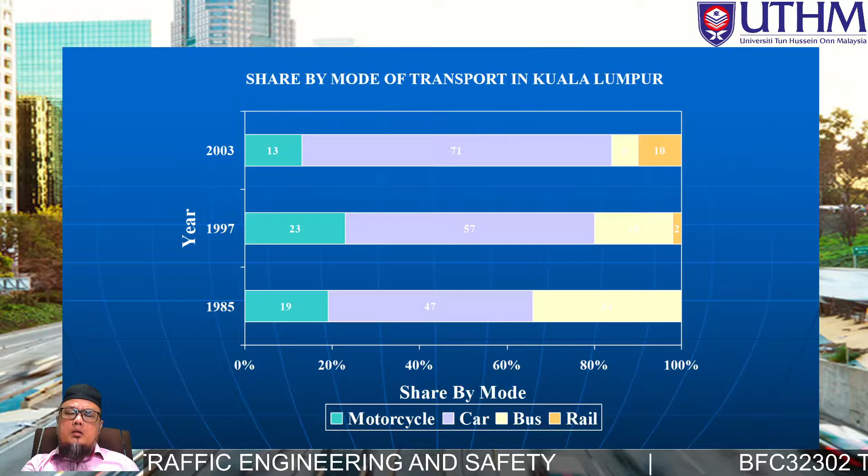And very few people use the bus nowadays. The bus still operates for service, but with very limited numbers. Now rail-based transport has become the popular transport - LRT, monorail, ERL, and now MRT.

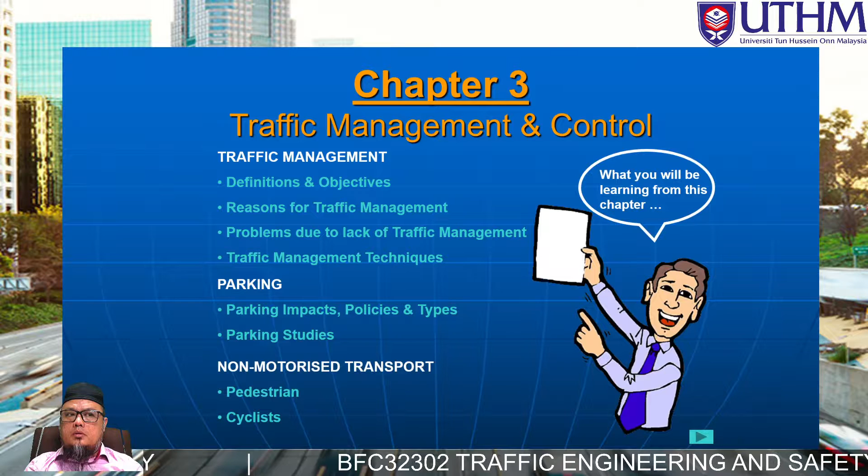We provide more lanes, but we create more congestion because people go to use their own vehicles. But if we concentrate on public transport or other modes of non-motorized transport, it can create sustainability in terms of the transportation system.

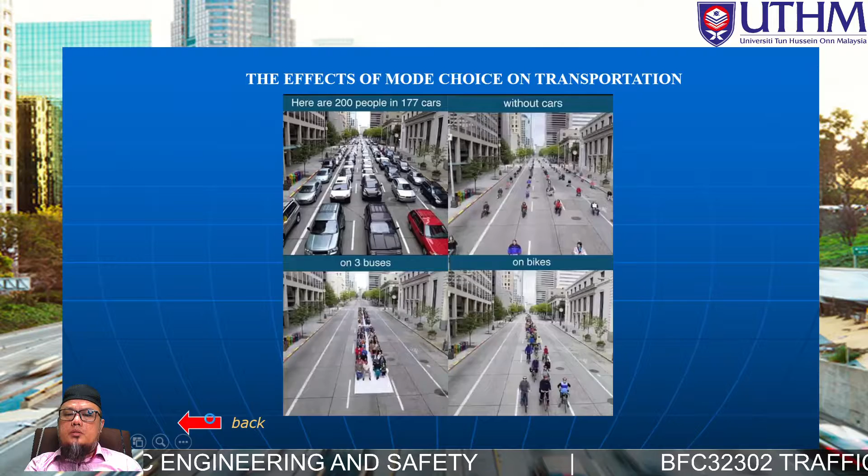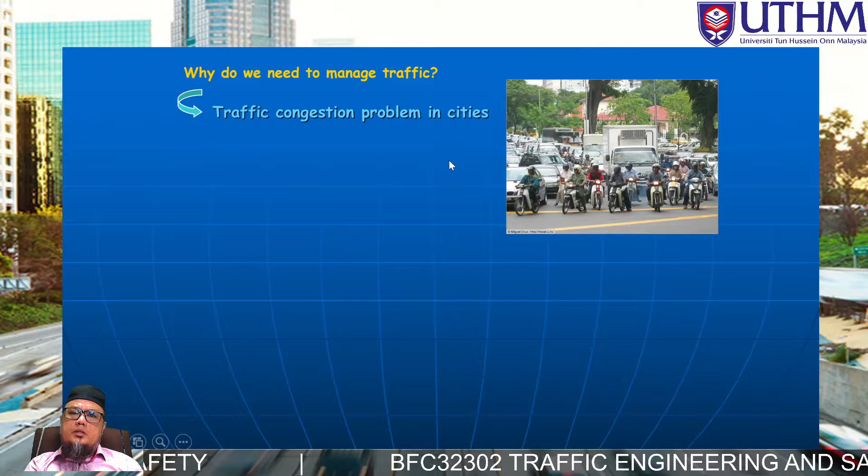Why do we need to manage traffic? We go back to the problem of congestion - that's why we need to manage our traffic. High urban population growth results in increased vehicle ownership, as we've discussed. The number of private vehicles traveling in the city is high, resulting in traffic jams. You can see this scenario every day in the KL city center.

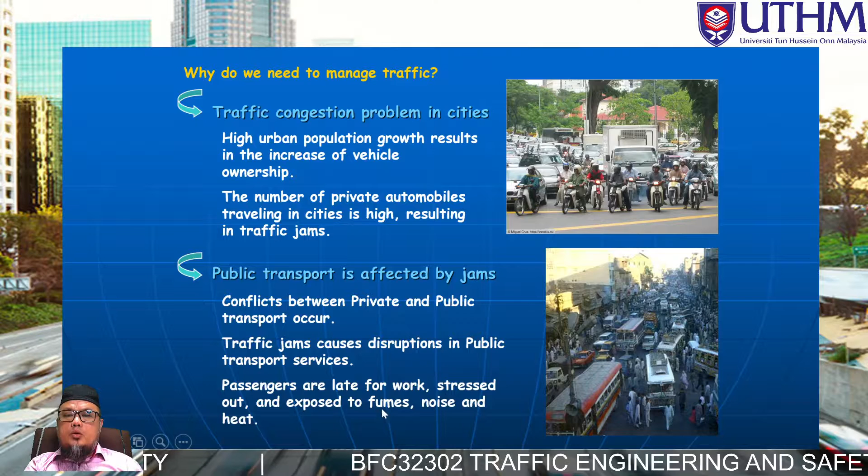Public transport is affected by jams. Even if we try to provide more public transport, they also suffer because they share the same infrastructure or route network, unless a dedicated lane is provided for buses. There's conflict between private and public transport - traffic jams cause disruption of public transport services. Passengers are late for work, stressed out, exposed to fumes, noise, and heat.

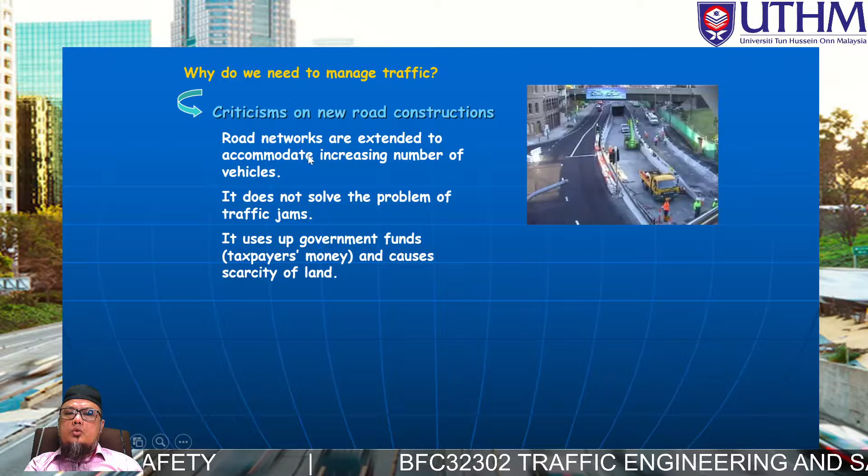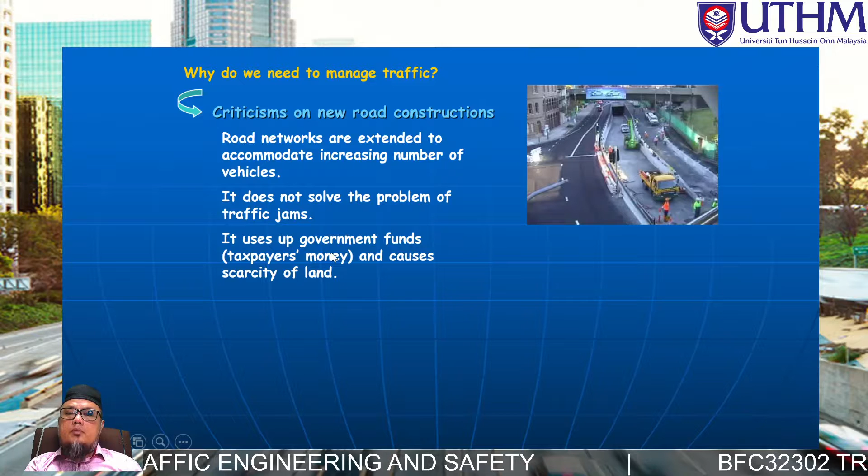Other negative impacts are environmental and health issues due to emission of carbon from combustion engines, which creates pollution. High energy from fuel consumption, exhaust fumes, heat, and noise cause pollution and health problems.

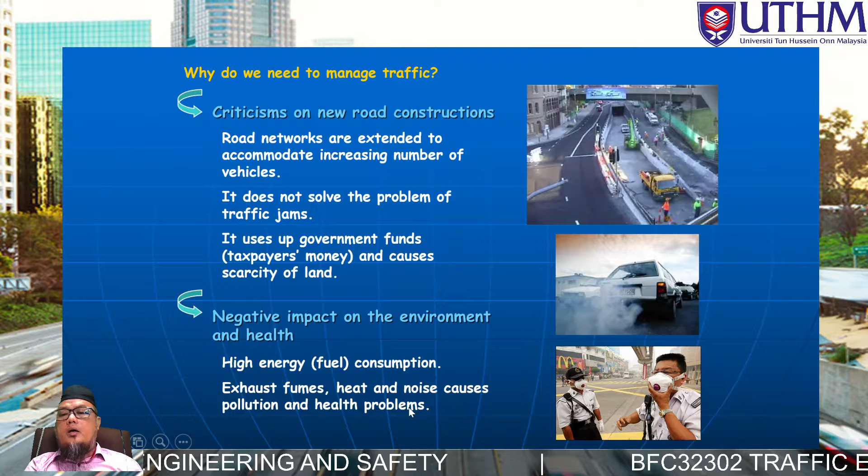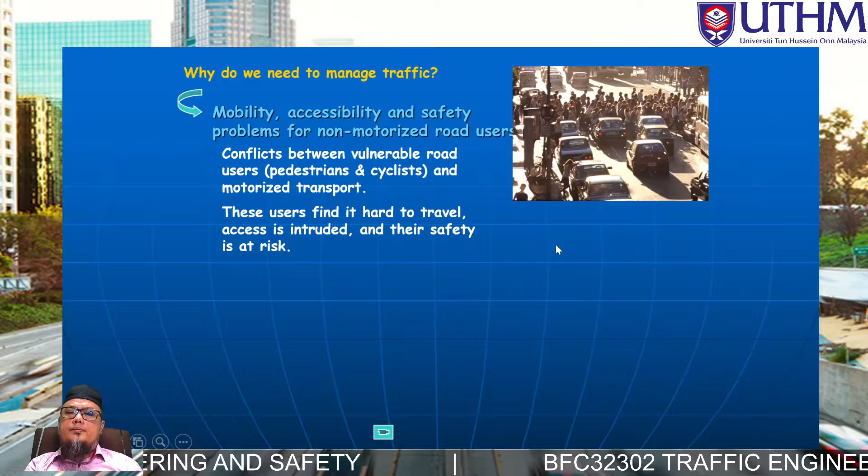Next, increased travel cost. Cost in terms of money and time increases as more time is spent on the road due to traffic jams, because we're stuck in the road using fuel that takes a lot of time. Then we produce more fuel consumption. This is quite a sarcastic message directed at the combustion or fossil-based fuels.

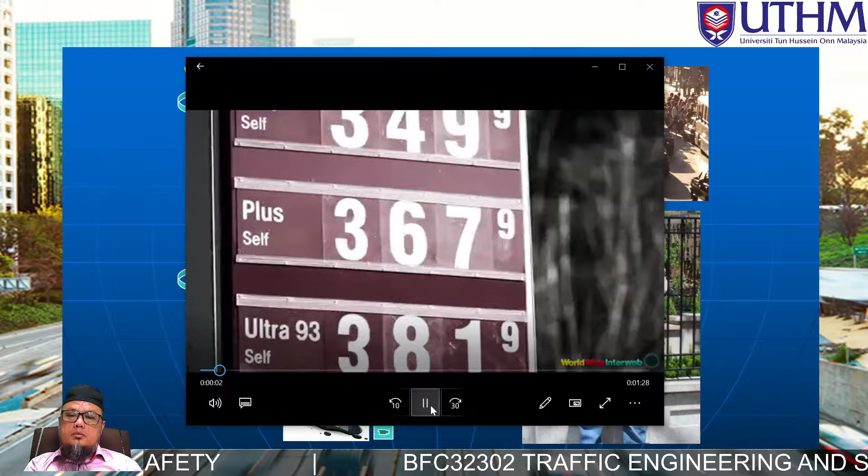As oil gets scarcer, gasoline gets more expensive, and the planet suffers. Electric cars? Most of their electricity comes from coal-fired plants or nuclear reactors. So what's the answer? How about a car that's good-looking, affordable, and runs on clean...

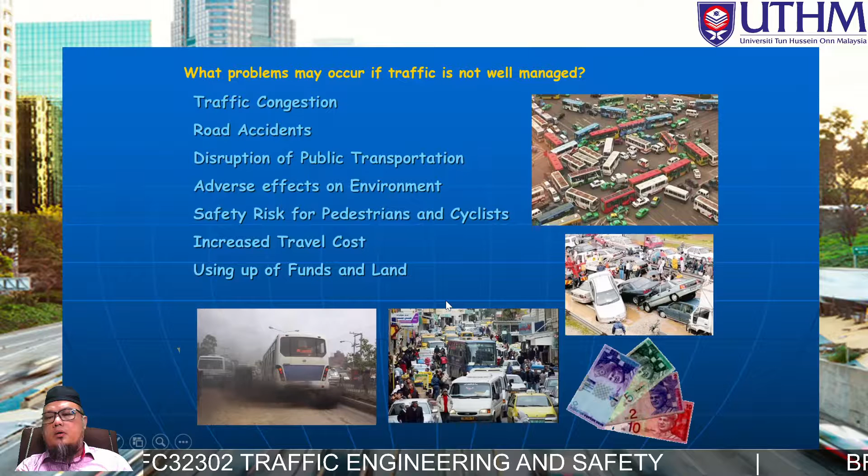What problems may occur if traffic is not well managed? We see this kind of scenario: traffic congestion, road accidents, disruption of public transport, adverse effects on the environment, safety risk for pedestrians and cyclists, increased travel costs, and using up fund and land, with a lot of area being used for infrastructure.

Traffic management technique. If you look at this matrix or table, it simplifies what category we're going to focus on. We focus on improve capacity, or we're going to allocate priority of road users, or we're going to constrain some categories of vehicles.

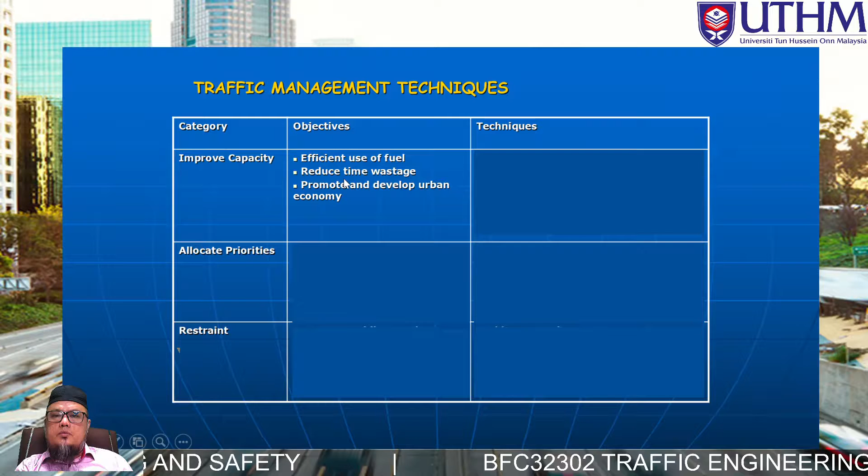Let's move to the objective. If the objective is to achieve efficient use of fuels, reduce wastage, reduce time wastage which is delays, and promote and develop urban economy, we can use this kind of technique or approach.

If you focus on allocating priorities, objective one is to protect non-motorized road users, vulnerable users from pedestrians and bicyclists, and increase effectiveness of higher occupancy vehicles. This one is focused for HOV. Later we're going to cover what HOV is, high occupancy vehicle, which means more passengers on the vehicle.

Next, for the technique for this purpose, we're going to focus on pedestrian areas or pedestrian precincts, cycle lanes, bus and HOV lanes, selective detection at signals, and exemption from other regulations.

So if we're going to do restraints on certain vehicles, why do we want to improve public amenity, protect environments, or improve safety? We can impose techniques such as parking controls, physical restraints, area licensing, road pricing, and traffic calming schemes.

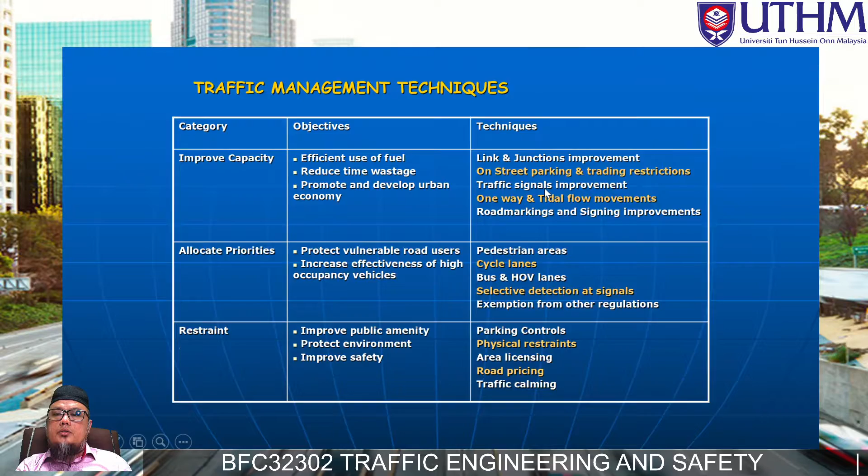If you go to the details, the first one is link and junction improvement or on-street restrictions. This one is link and junction improvement. Purposely, if you do this kind of method or approach, we're going to increase capacity and enhance safety, reduce delay, and control speed. So this is the generalization.

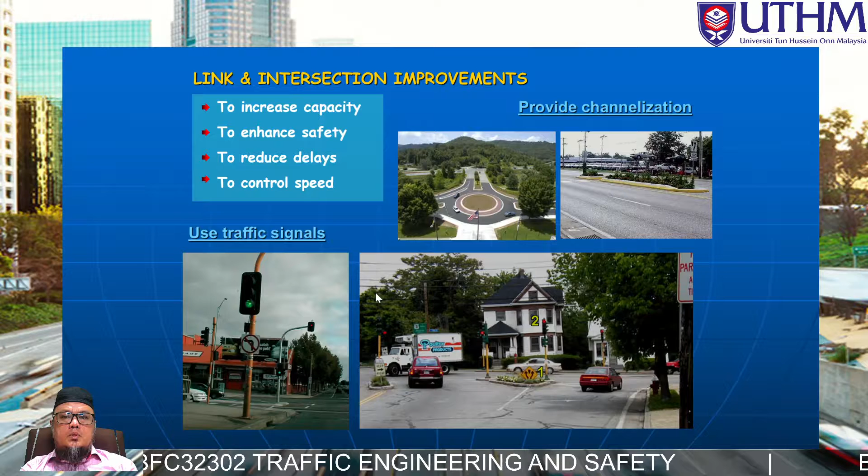Next, create safe crossing for pedestrians, provide large waiting area, pedestrian refuge, and shorter cross distance. This is the typical pedestrian crossing area, and this one also the crossing area for mid-block. They have a staggered crossing because the lane number is quite many, so they have 4 lanes to cross. They put a pedestrian refuge area here, so you cross the first lane or first direction lane, wait here to get clearance or a safe gap from the vehicles, and cross again.

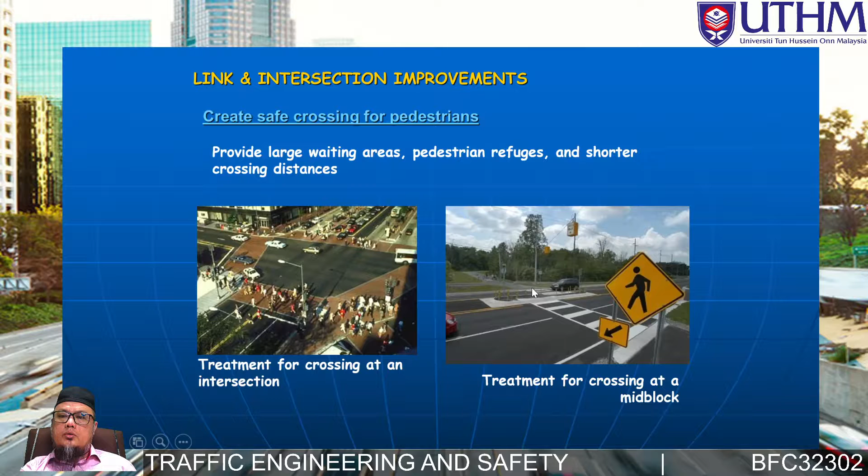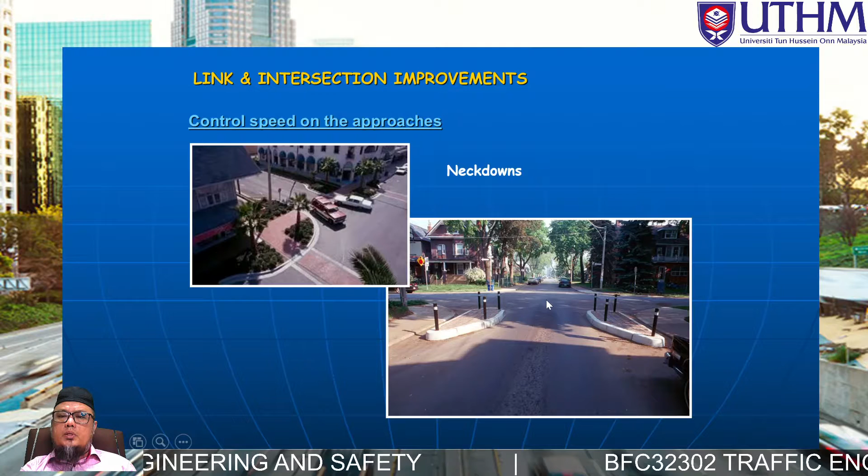Now we have control speed on approach, so we have neck-downs for particular approach intersections. They built traffic islands or hard landscaping or curbs here, typical physical islands to choke or neck down this particular approach, so the vehicle is going to slow down.

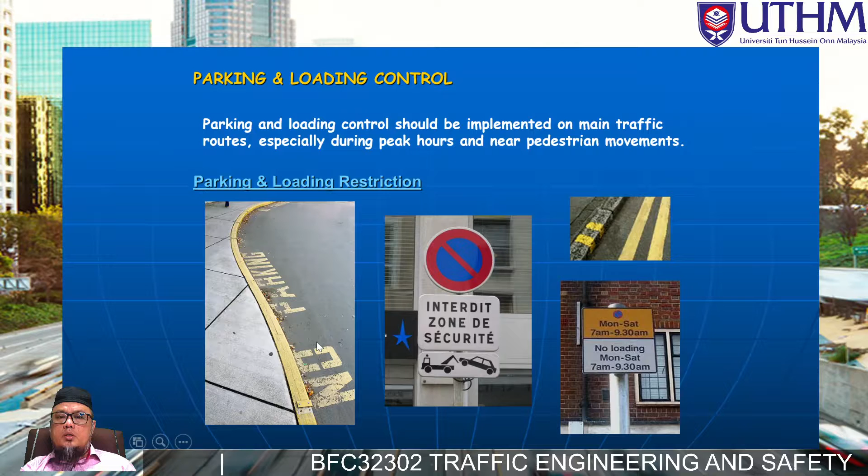Here is parking and loading control implemented on the main roads, especially during peak hours. They put the sign here, no parking restrictions. The benefit of parking and loading restrictions is to relieve traffic congestion, so we avoid people waiting because of vehicles trying to unload passengers or goods.

It also improves safety and improves visibility for pedestrians to cross. Like this particular scenario, if there's a parking medium-sized vehicle, a lorry or utility vehicle, it's hard for pedestrians to cross because it blocks the sight distance.

One, on-street parking restriction enforced, provide sufficient off-street parking. If we're going to restrict this particular parking facility, we have to provide other options for off-street parking space. We're going to cover that in the second part of the lesson.

Okay, designate loading areas, allocate for loading activities. Loading can be permitted only for the back lanes. For example, a particular supermarket has its own access to the back or rear area to load goods or services.

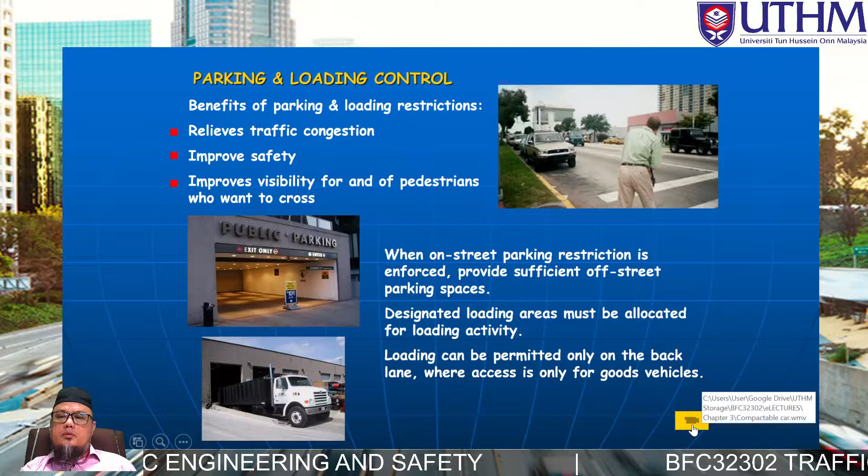Unless we're going to use futuristic, maybe nanotechnology like this one, it's quite impressive. If we have this kind of technology, there's nothing to worry about spacing for parking anymore.

Okay, turning and entry restrictions. We provide rules where some vehicles are not permitted to turn right or left, or some vehicles are still not permitted to do U-turns. So we put some kind of sign to inform that a particular zone or movement direction is not permitted.

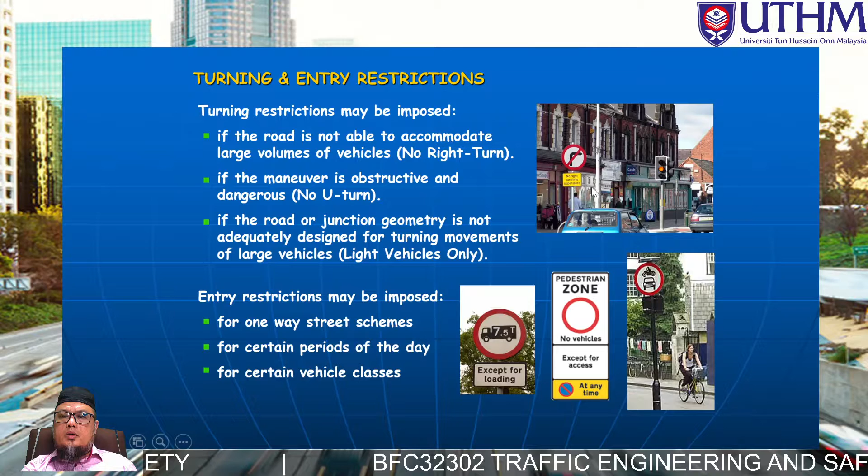Okay, contra flow, or tidal flow, or reverse flow. What's the scenario? We normally have quite massive traffic during peak hour or rush hour, in the morning let's say, or in the evening. So some direction of travel lanes have very heavy traffic, while the other lanes have less traffic, so they occupy one of the extra lanes from the opposite travel direction.

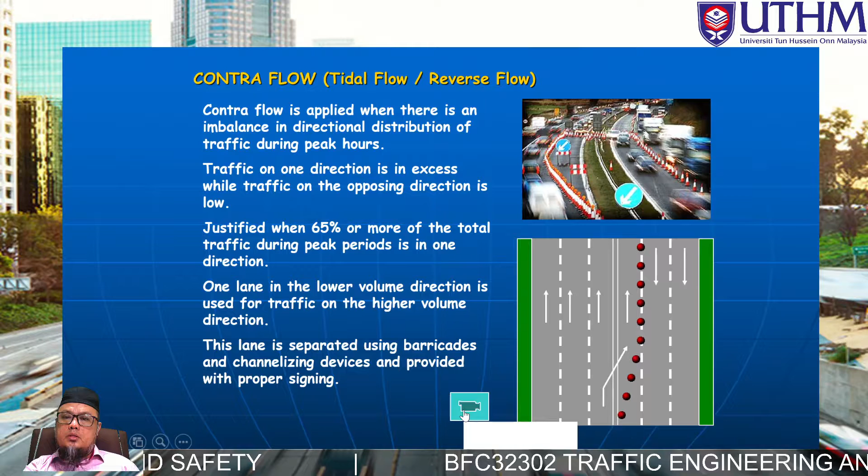It creeps along like a rolling centipede. If you blink while driving down the 15, you'll miss it. But if you slow down and focus, you'll see what Caltrans calls a barrier transfer machine. Normal people call it a zipper. It moves the concrete barrier dividing the express lanes one lane over. It moves slow. Really slow, like 8 miles an hour slow.

But this monster of a vehicle could make the commute up and down the 15 much, much faster for the 169,000 people who use it every day. It gives motorists more flexibility.

All month long, 2 zippers will be moving the center divide over 2 lanes. On a normal day, 2 lanes go each way, but this month, 3 lanes will go at the rush hour commute. Del Cerro resident Alexandra Brown already saves about 20 minutes using the express lanes. If there was 3 lanes, that might help the speed of the commute.

But don't get used to it. Caltrans is only studying how well the zippers handle the 2-hour trek up and down the 15 twice a day in between rush hours. We will be reconfiguring the lanes on a daily basis. Then it will stop at the end of April. It will be up to Sandag, which actually manages the express lanes, to decide whether they want 3 lanes or only 2 for the rush hour commute.

In the meantime, Caltrans wants you to keep an eye out for the barrier transfer machines. You can see in this video from a GoPro outside my 10 News Prius, the zipper is like a giant slow-moving vehicle in traffic. Whether they'll keep moving the barriers back and forth has yet to be decided. Along the 15, Joe Little, 10 News.

Let's take a closer look at the 15 freeway. This is where the lanes will be moved for the traffic. There will be concrete barriers from the 78 on the north side to the 163. There will be more lanes on the southbound side coming down in the morning commute, and on the northbound side, more lanes for the evening.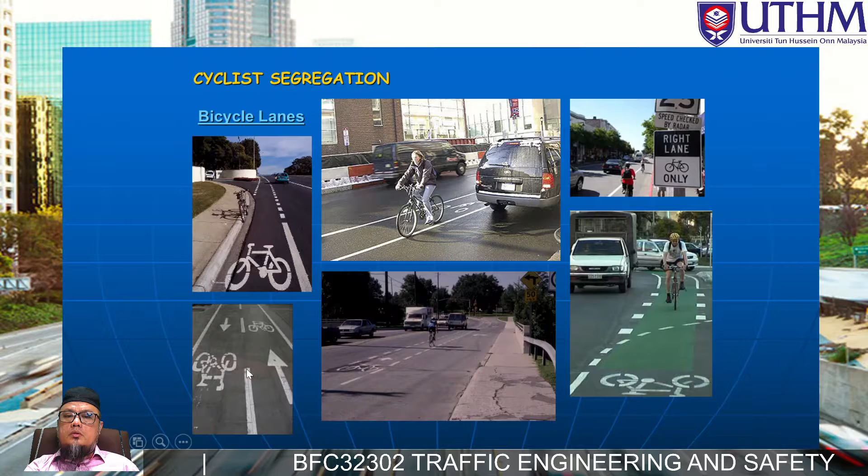Okay, next, bus priority. Smart intersection. Use bus detector to manipulate traffic signal which allow green phase for bus. So we have communication from the traffic signal to allow such vehicle like bus, emergency vehicle, rescue vehicle to give a priority during approaching the signal lines.

So they're going to have a loop detector underneath the pavement, or they can put it into the cable or street lighting pole or traffic signal pole to communicate the radar or the signal.

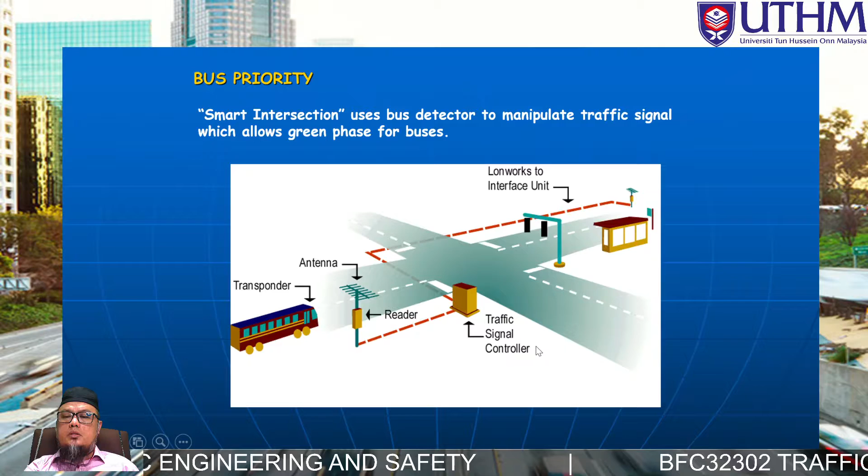Okay, traffic restraints. The types of traffic restraint measures. First, do nothing - this is part of the solution. The approach gives opportunity to the drivers to select the option, to resolve things themselves. Drivers eventually adapt, traveling during off-peak hours resolves some issues. They choose alternative routes or take alternative modes of transport. Because they do nothing, they want to study the road user behavior. But this is just temporary.

Second, physical measures. Ban or prohibit entry for certain classes of vehicles, like imposing restrictions for turning, bus lanes, bicycle lanes, and things like that.

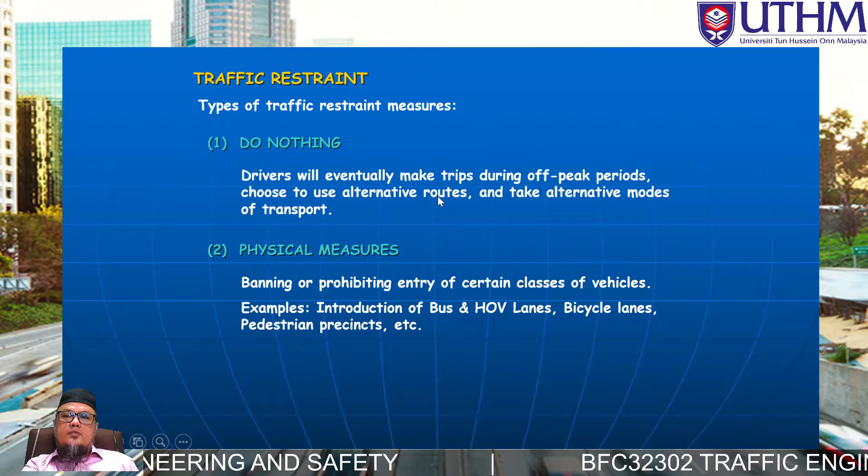Okay, regulatory measures. We impose parking, waiting, and loading area restrictions, or impose stiffer penalties if regulations are violated. We limit the number of parking spaces in the city, and impose higher tax for parking operators. This is in terms of regulatory measures.

Okay, the fourth one, fiscal measures - we use a financial approach. We put tax on the vehicles. Now they practice tax for vehicles, the fuel tax. This is also called road pricing and area licensing, where on any road network, they put a charge, like in Singapore with electronic road pricing. We need to bring an auto pass, like a smart tag or touch and go.

It's also practiced like toll roads. Road pricing is typically like a toll road. But area licensing is more like a cordon - for the cordon, you go there and they charge you. Sometimes they charge based on the length you travel, or based on the time you enter, how long you stay in that particular area.

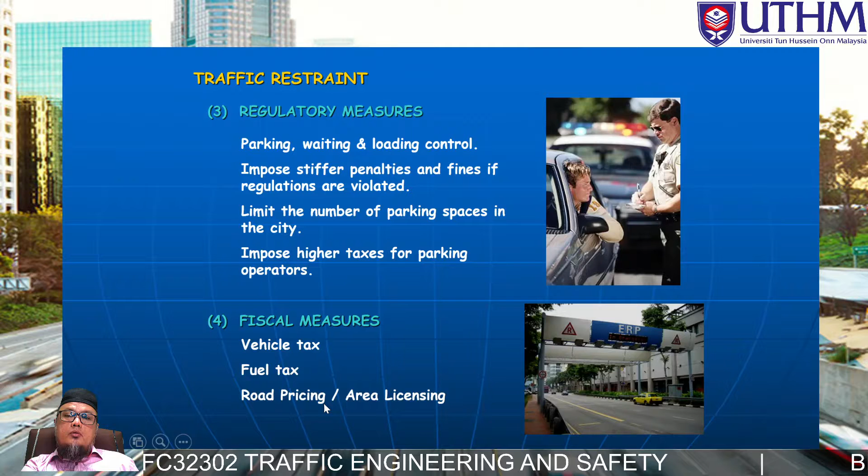Okay, next, traffic calming. Traffic calming involves changes in street alignment, installing barriers, and physical measures to reduce speed or cut-through volumes, in the interest of street safety, livability, and public purpose. So we have a lot of traffic calming schemes - more than 16 types. But we can categorize them as vertical deflection and horizontal deflection. So they can only be categorized as two, but they have a lot of types.

So the first category, vertical deflections, we have speed hump and speed bump. Sometimes people get confused about whether it's a speed hump or speed bump. Speed humps are wider compared to speed bumps. Speed bumps are narrower, but the vertical effect is not pleasant, while humps are smoother and feel more pleasant. This one has a bit of a bump, this one is a bit flatter. Okay, speed lumps are like a panel with rough texture, like panel-panels.

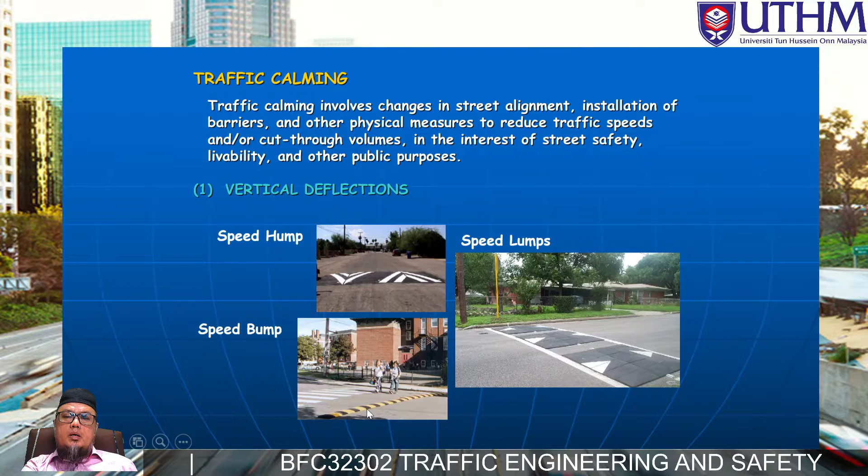Okay, next we have speed table, also covered under vertical deflection. Speed table is more like a raised crosswalk, but wider compared to the raised crosswalk. Speed cushions are quite similar to the lump, but these are installed just at a single lane's width. But some small vehicles may be able to weave around them.

Okay, textured pavement uses individual blocks installed in place. And raised intersections, which means at the middle crossing of intersections, in the center, they build a raised elevation to create a speed reduction effect for vehicles crossing.

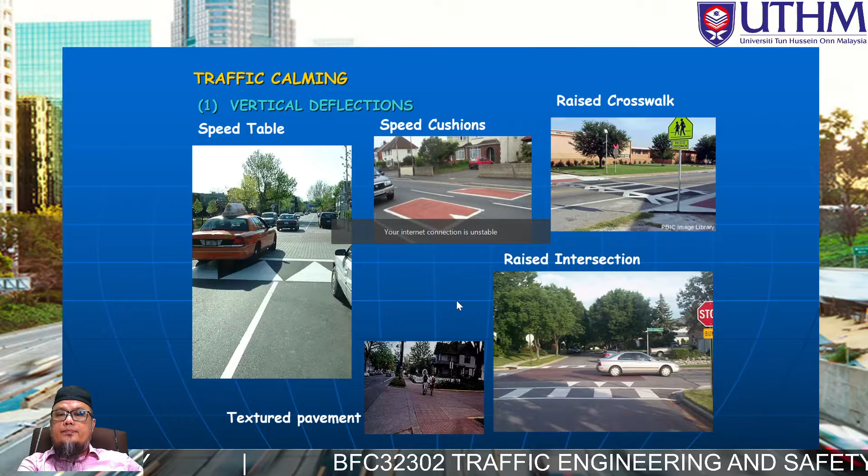Okay, next we have horizontal deflections - the first category was vertical, this one is horizontal. The first type is traffic circles, which are quite small compared to roundabouts. Roundabouts are of course larger in size compared to traffic circles, and they have travel lanes - either two single travel lanes or one single travel lane - with crossing facilities for pedestrians.

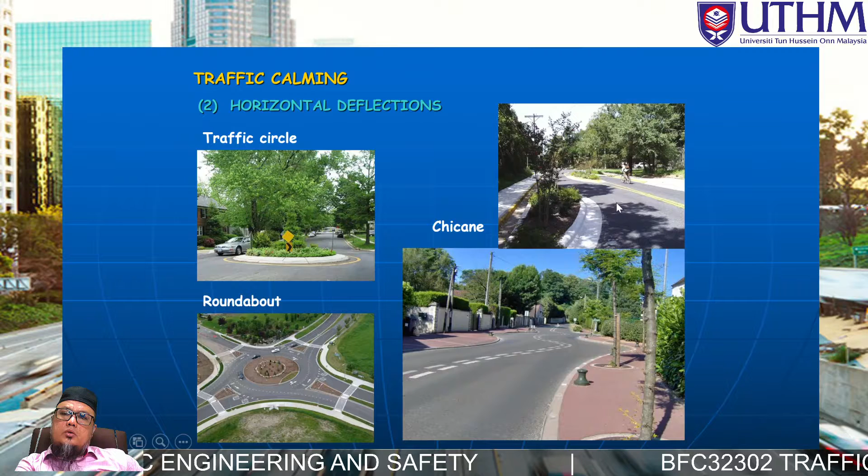Okay, next they have a chicane. The effect turns a straight road into one with a cornering effect, like a track for Formula One in a circuit. So the road design is actually straight, but they want to give the effect of cornering, making the road look like it's not really straight. So they extend it beside the shoulders, creating a curve, a sway curve, or they create traffic islands to make the road look like it has a corner effect.

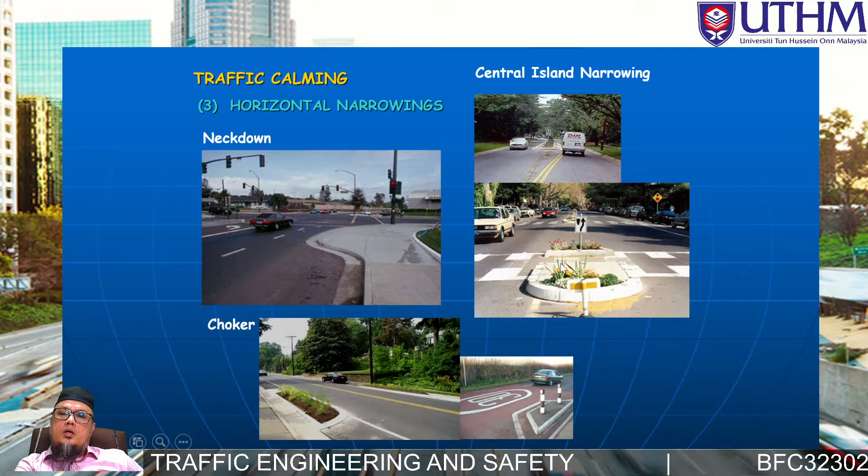Okay, this one is a central island - they split what would be a straight road without any barrier, just creating a small island to give an effect, and in some parts they need to provide crossing for pedestrians. Okay, this is access point management - in some locations the main road directly accesses the driveway.

So this we call driveway. It's not good practice because the speed relativity is quite high.

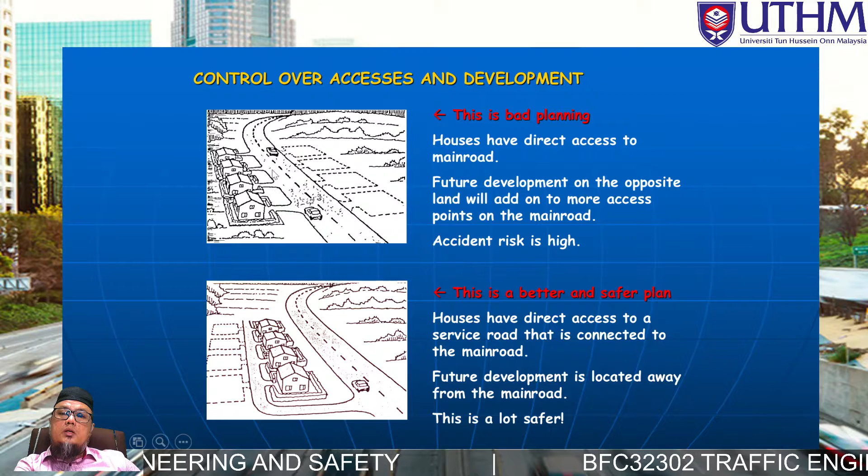This is not good practice because they do upgrading of the road. So if you want to plan a new road, it's supposed to be like this. This is the highway or main road, and going to the housing area, they're going to have a service road and access from the service road, not directly joining the driveway to the main road.

So as enforcement law to be practiced, speed limit and speed zone is quite typical enforcement to put road traffic zones in the school area or certain areas where we limit the speed zone.

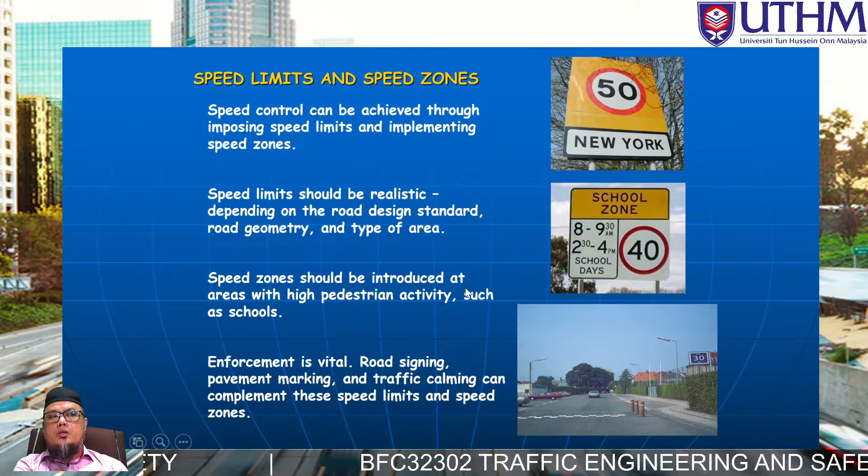Managing heavy vehicles, good vehicles. Heavy goods vehicles are a nuisance to traffic, cause damage to the road pavement and structure of the road, impede traffic, and when involved in an accident, cause serious injury and damage. This is the scenario, the effect or consequences of these vehicles.

Area wide heavy vehicle management scheme - they allow special provisions for entering and passing areas for road sections. HGV cordon used to prevent movement or still permit access. Sometimes they just limit, sometimes they just give access, off-peak travel for HGV.

So I think during the past 5 to 10 years, the government also gave some limitation to heavy goods vehicles to travel during peak hour, especially on festive seasons.

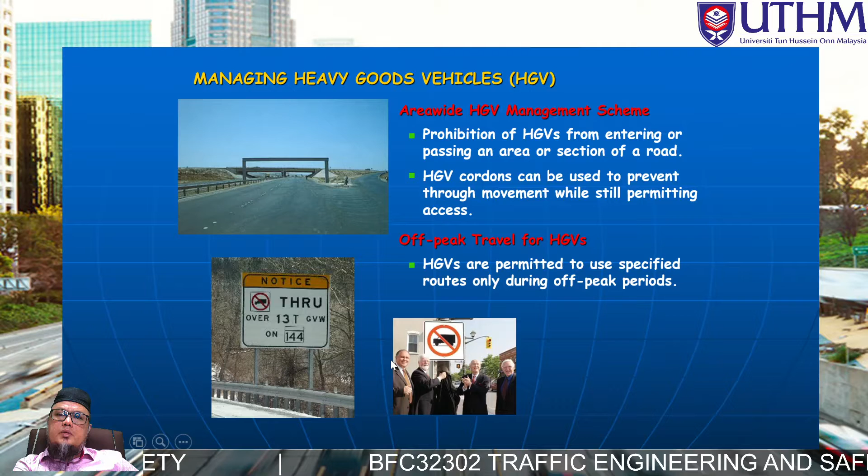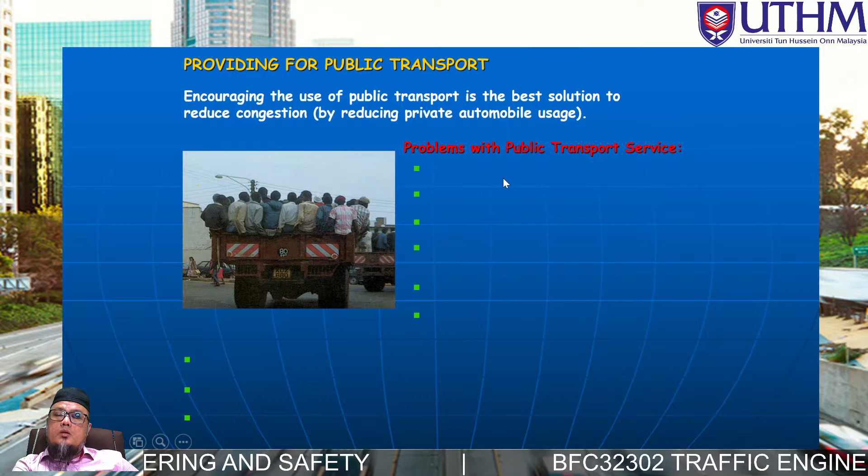Providing for public transport - encourage use of public transport, the best solution to reduce congestion. There's a problem when we try to serve the public with public transport, but somehow this is quite a typical scenario.

Problems include inadequate services during peak hour, overcrowding, small size vehicles crowded with passengers, delays and inconsistent schedules - normally you wait a long time to get public transport.

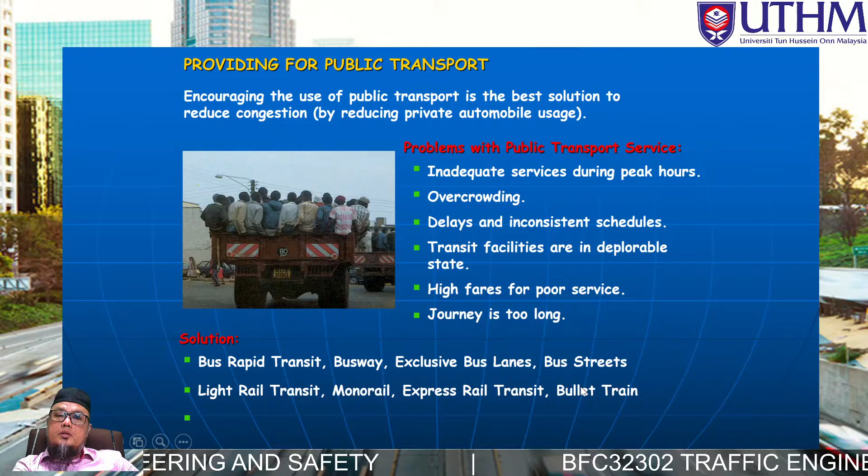LRT, this is rail-based, this is bus type. LRT, monorail, express rail transit, bullet trains, or MRT nowadays we have. We also have others to improve transit facilities.

This is quite typical in terms of the facilities for public transport. So here they have a bus, a normal bus.

Bus priorities, bus rapid transit - this is quite a small one, but I will show you the large bus transit system. This is the intermodal concept, where you move from one public transport to another, from the bus to using trains or commuters.

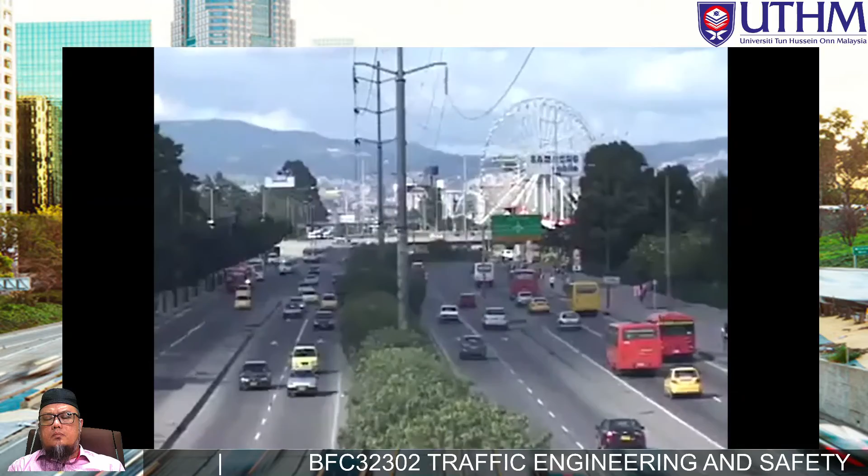At the end of September, I went down to Bogota, Colombia with Clarence Eckerson from Street Films, Carla Quintero from Transportation Alternatives, and Ethan Kent from Project for Public Spaces came along for the ride as well. We were taken around by Guillermo Gil Peñalosa, brother of the former mayor Enrique Peñalosa, who gave us a great tour. We saw all these incredible urban design innovations that Bogota has been working on for the past dozen years or so, and it was really impressive. We got to look at the city's bus rapid transit system, called Transmilenio. About 10 years ago, when Enrique Peñalosa became mayor, there was a plan on the table to build a network of elevated highways throughout Bogota. It was an incredibly expensive, multi-billion-dollar project, and Peñalosa and his administration looked at this project and said this isn't going to do anything to actually solve our traffic congestion problem.

It's going to create huge negative environmental impacts on the city as a whole. So Peñalosa decided to scrap that project and instead, for a fraction of the cost, replace it with what I think still today is probably the world's most advanced bus rapid transit system.

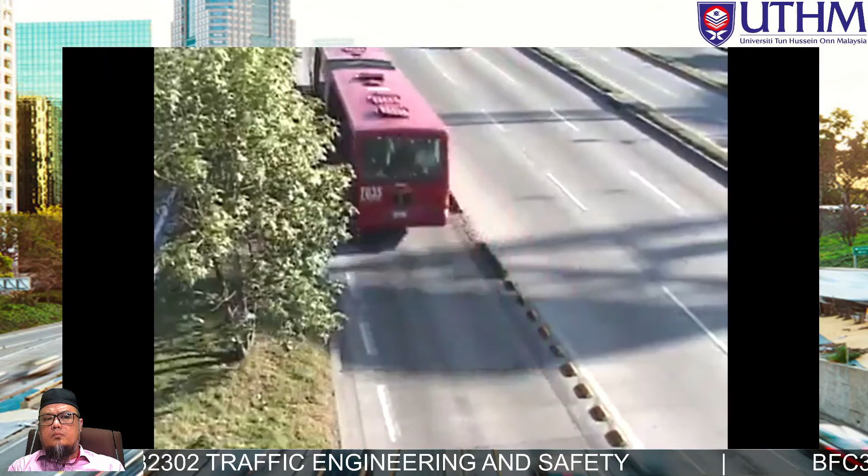Tell us what is Transmilenio? Transmilenio is a bus rapid transit, an economical model specially developed to operate in Bogota in the main corridors, with the objective to give a segregated lane, exclusive lane for big buses, so people can move very quickly, but with 10 times less the cost of the traditional mass transit system in the world.

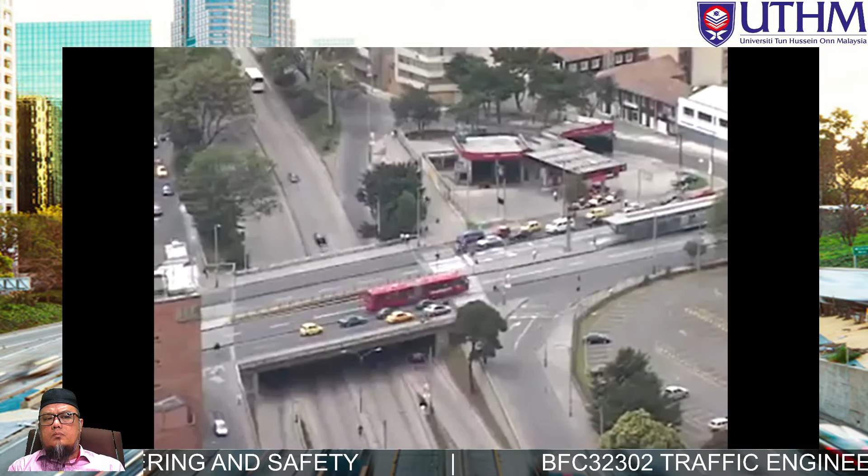Some people call it surface subway, and you could kind of see why. It's buses on rubber wheels, just like you'd see buses in New York. But what they've done is, in the middle of these busy multi-lane avenues, almost highways, they've taken away a couple lanes in the middle and built these stations. Next to the stations, you'll see usually 2 lanes of buses running on either side: one lane for local bus traffic and for buses to pull into the station, and another lane for the express buses.

The buses pull right up to the platform so that the floor of the bus is level with the floor of the station, so it's really easy for wheelchairs and older people and people pushing strollers to get on and off the buses. I got to interview the CEO of the Transmilenio system, someone who was there from the very beginning and worked her way up.

Before Transmilenio in 1998, one trip of 30 kilometers could take 2 hours to 2 hours and 15 minutes. That same trip you can do today in 55 minutes. And how many people are you moving every day? Around 1.3 million people per day.

I think nobody believed in Bogota that we could change the way to transport our people, because since 1947 we started doing studies, 50 years trying to do something about this, but nobody said we are going to do it. They took us on a tour of the Transmilenio control room.

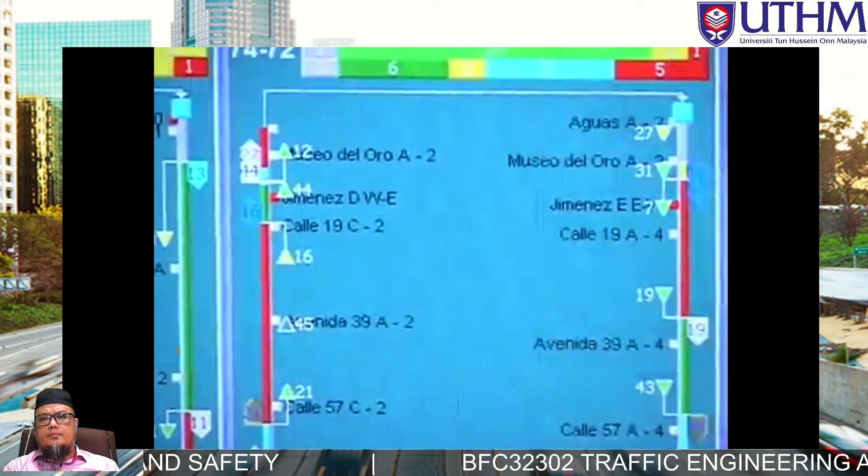It was almost like air traffic control, and in fact that's how they compared it. There are 6 different companies that actually own and operate the buses themselves. How many buses are you guys controlling in here at rush hour? In a peak hour, like 1,000.

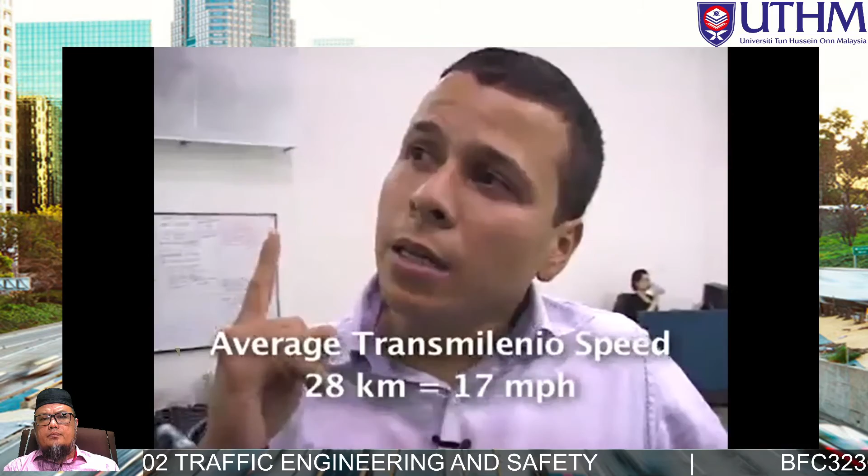Do you have a sense of an average speed? 28 kilometers per hour on average, but we have lines of near 40.

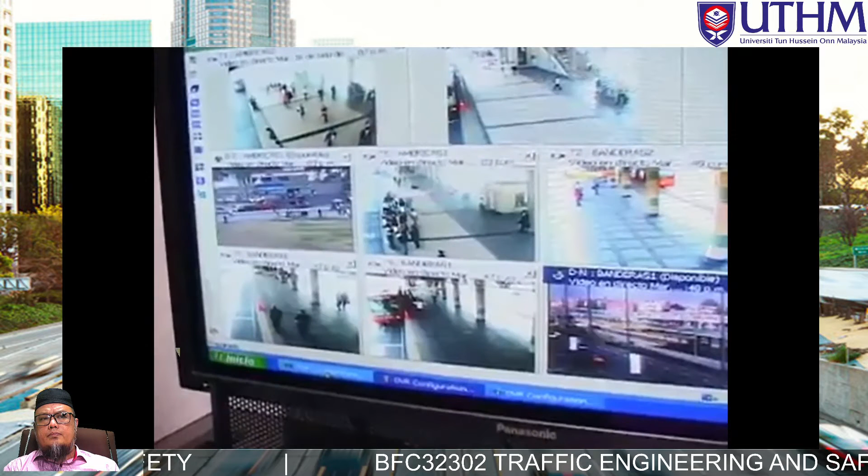This central hub that we visited dispatches the buses. It follows them around the city in real time, and they can communicate with drivers individually. You see a photo of the bus driver pop up on the controller's computer screen when he's getting ready to talk to that guy. They can see if buses are starting to bunch or stack up together.

Most of the Transmilenio system are these double long red buses, but traveling around through city neighborhoods, you see these much smaller green buses, called feeder buses. What the feeder buses do is travel through neighborhood streets, picking up people and taking them to the bigger bus stations.

One of the interesting things about the green feeder buses is that they're free. You don't pay for your Transmilenio ride until you get to the bigger bus station. That's one of the things that really speeds up loading and unloading, kind of like the subway in New York—you're paying for the bus at the station rather than paying the driver and waiting for everyone else to pay.

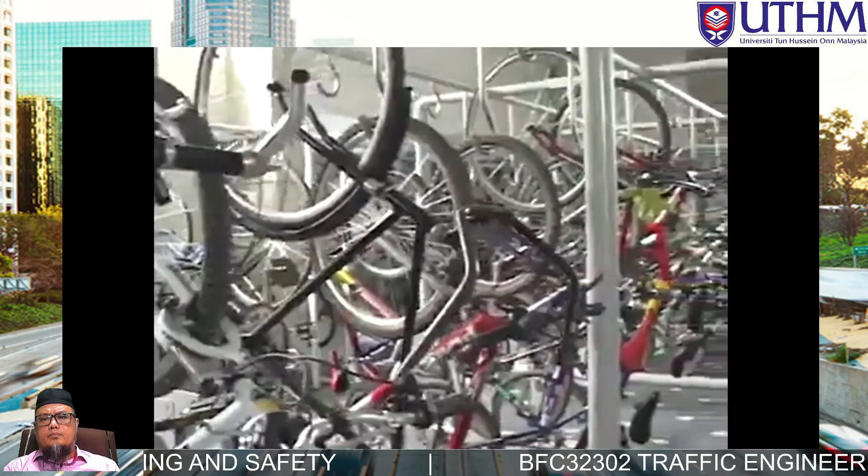One of the most impressive intermodal transportation features we saw in Bogota was this bike parking facility inside a bus station. For the Transmilenio system, it's very important to integrate transportation means. We have today 3 terminals and 1 station with bike parking facilities. In this case we're at the America's terminal. This parking facility has a capacity of 750. It's very safe, a good feeder system for the Transmilenio, and it's free.

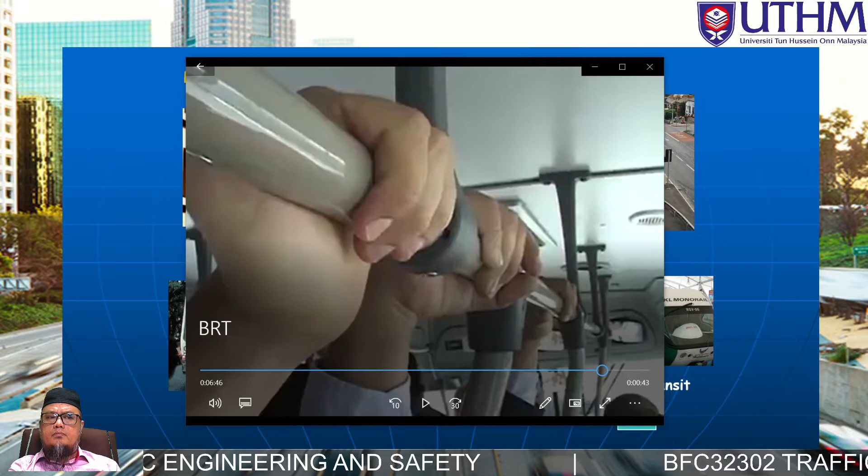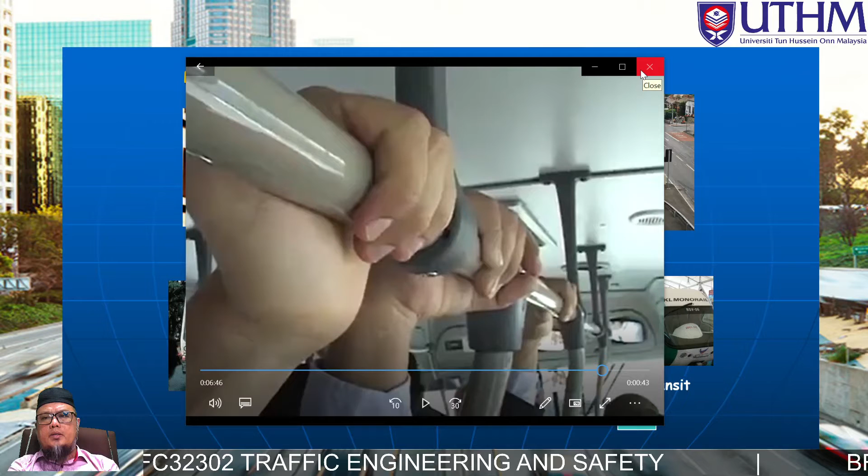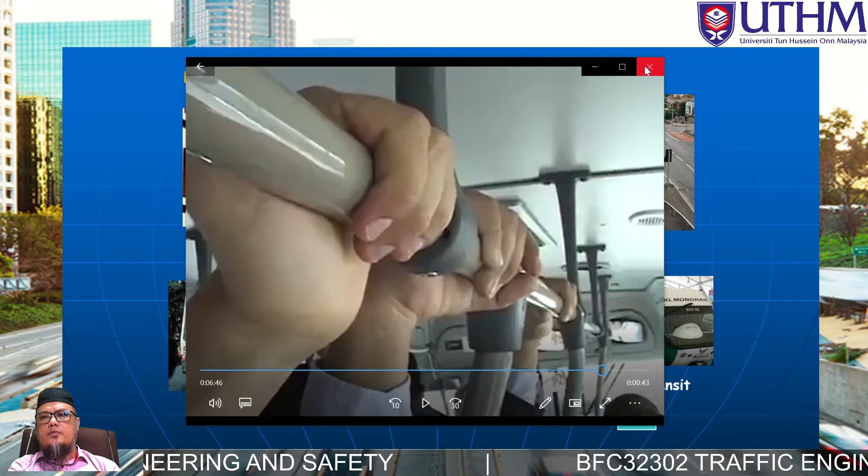So they have a lot of the system that incorporate with the BRT. They give free feeder bus to intermodal, and also facility for cyclists to park their vehicle, over there in a special area, free if they purchase the ticket for the BRT.

So we have some, not really advanced, but sometimes they have dynamic facilities like speed harmonization, queue warning, ramp metering, dynamic messaging sign, temporary shoulder use, automated enforcement, en-route traveler information, dynamic lane marking, and travel time signs.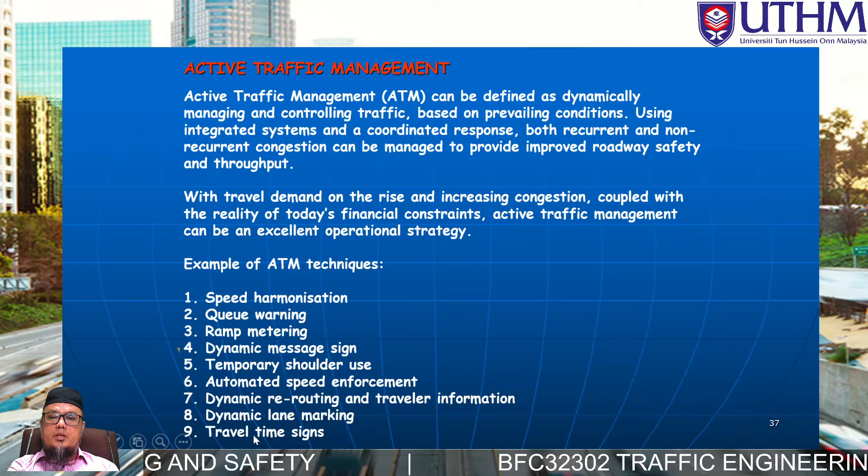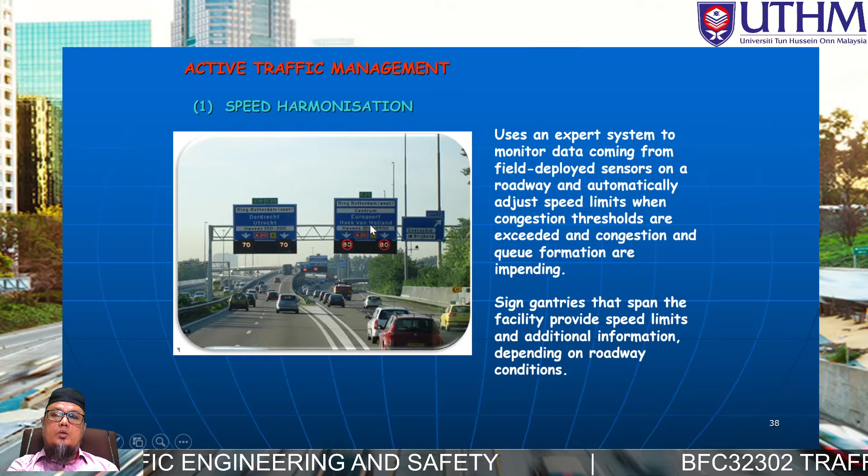So like this one, instead of using a typical traffic sign, you use a digital one to give some changing or dynamic information. This one sticks with 70, this one sticks with 80, but sometimes they can change, they want this one to be 70 or this one to be 80.

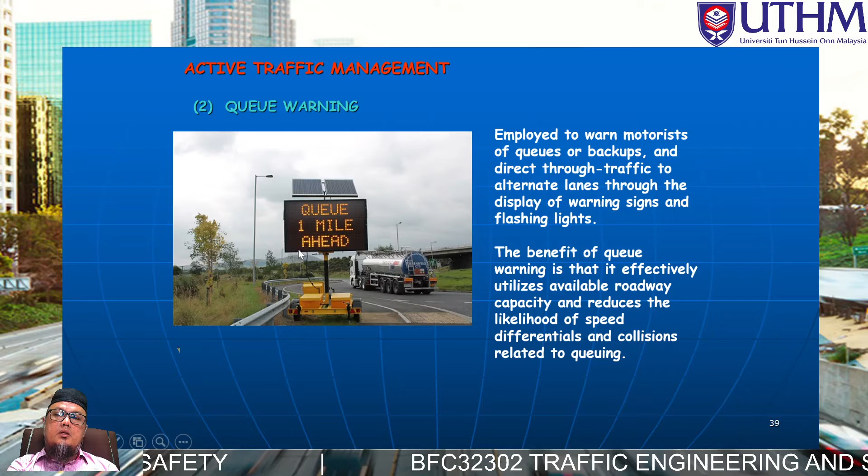Okay, this one gives information the queue is 1 mile ahead. The information is going to be dynamic, changing anytime.

Okay, this one is ramp metering. The vehicle going inside to join the highway from the on ramp, sometimes they have quite heavy traffic flow, so they stop a few vehicles queuing, and after some time release them in terms of gap into the flow.

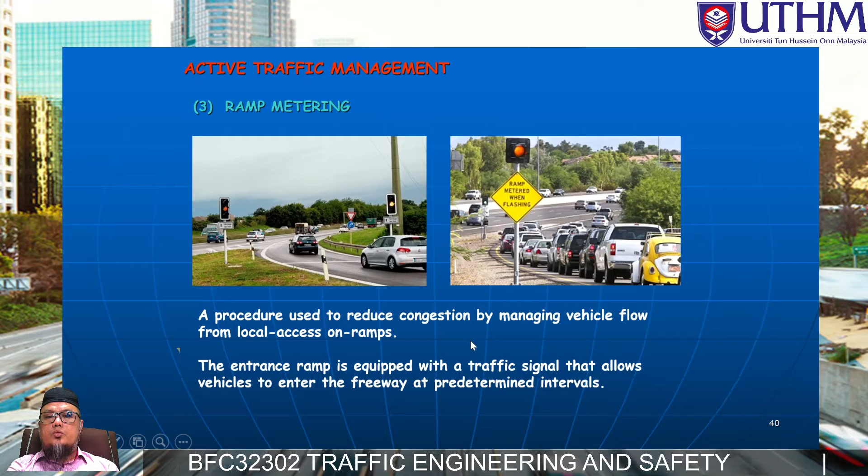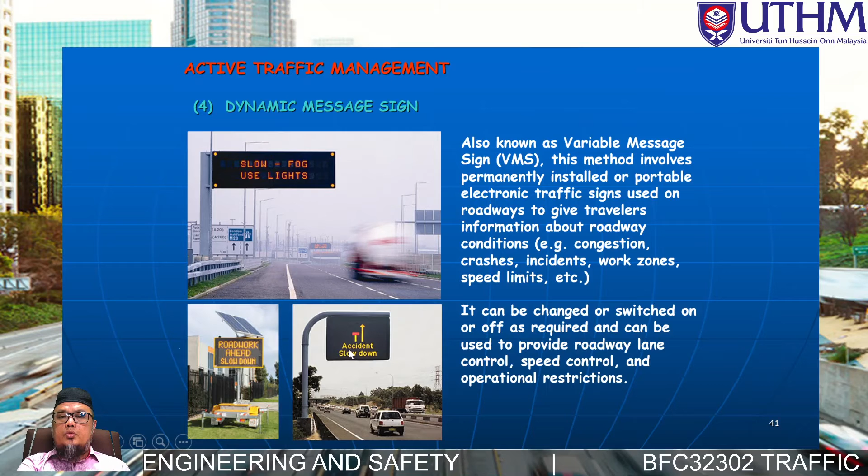So they're going to give a green time to other vehicles to access the ramp and join the highway. Okay, this is a dynamic message sign with the info here, showing the road works or accident or any conditions.

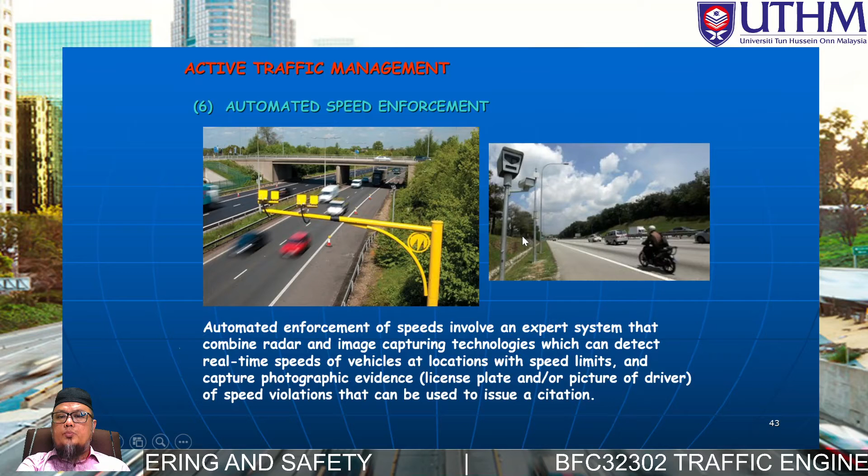Okay, this one is implemented in our country, even this is the view of our highway. Okay, automated speed enforcement. Okay, dynamic reroute travel information.

This one is going to give some additional info for travel times. So using this route, 9 minutes. Using this route, 12 minutes.

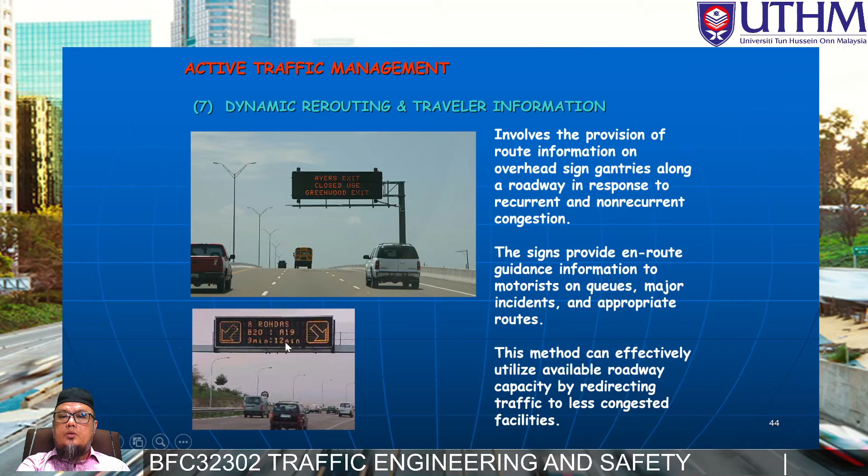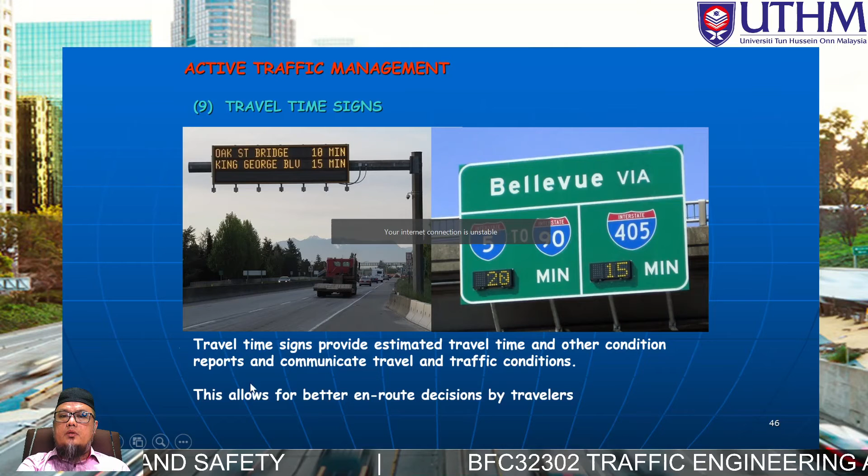Okay, also in Malaysia we do have this kind of facility, we call it intelligent traffic management system. Specific name: integrated transport information system, or ITIS. So this is only specific to KL City Centre, covering Kuala Lumpur or Lembah Klang only. It's not covering the whole nation, but specific under the jurisdiction of DBKL. So there are three parts of ITIS.

So the first is traffic situation monitoring, using CCTV camera detectors to surveil the traffic conditions. Then they move to advanced traffic management system, they gather the data and pass it to the traffic management center, so they can analyze the situation.

So now they can do the mapping of the traffic conditions or any incidents. Then they disseminate the information using various platforms, including the internet, call center, and also using a specific VMS or messaging at a particular route or section.